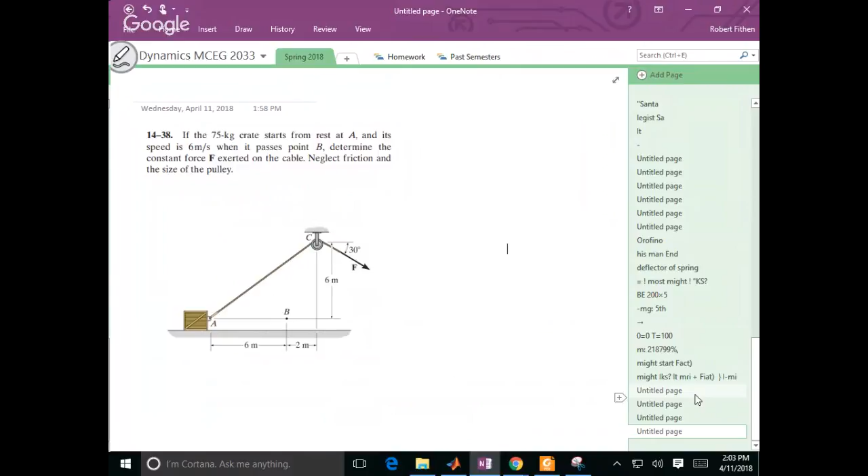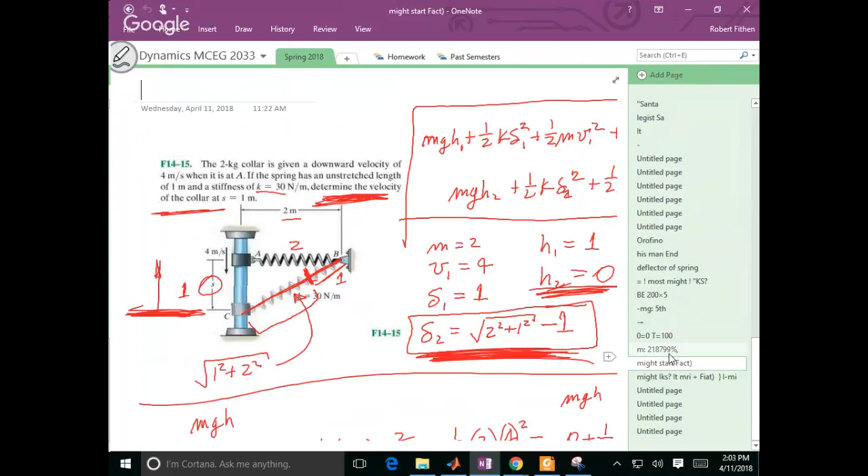4 problems on there. Figure if we can work those 4 by the end of the day. So what I'm doing is I'm basically, wait a minute. It didn't save. Yeah, it did. There we go. So that's where I left us at.

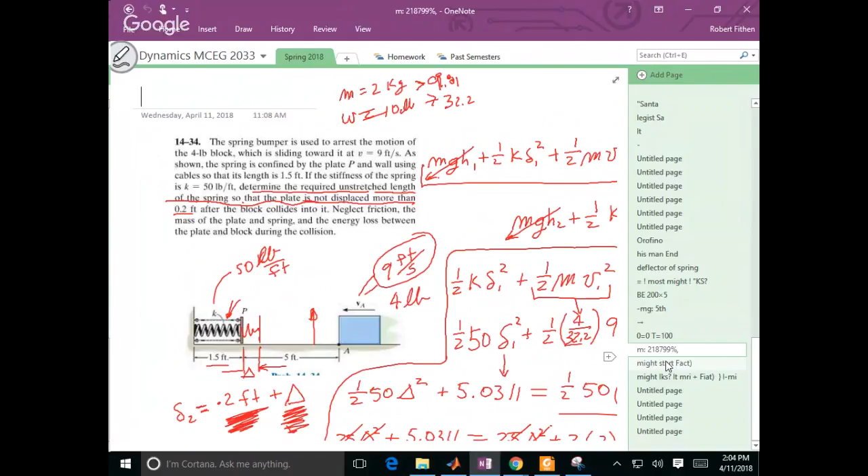And what I'm doing is I'm working other problems. And so I'm going to kind of work problems in theirs and then a different one in yours for about a week, so that I'll cover a lot of problems, but they all look about the same. So I work those problems. And there's the video there. You could watch it in high speed, actually. So I'm going to do the same thing and work this set. And then that means Friday, I'll start 15.

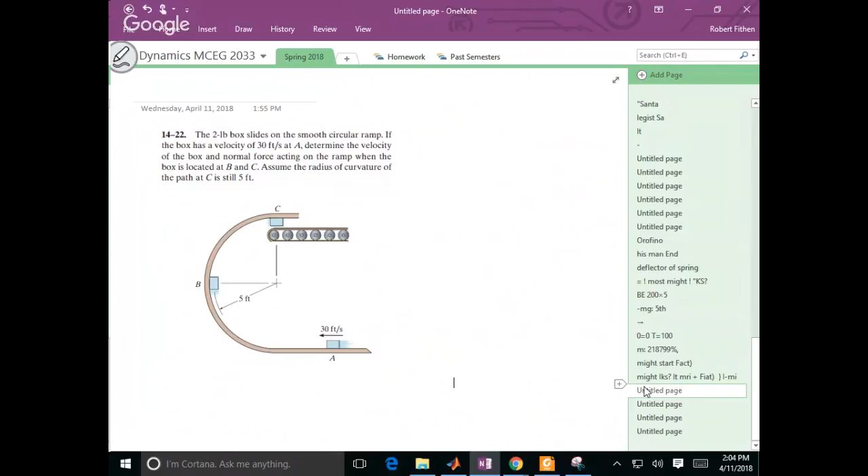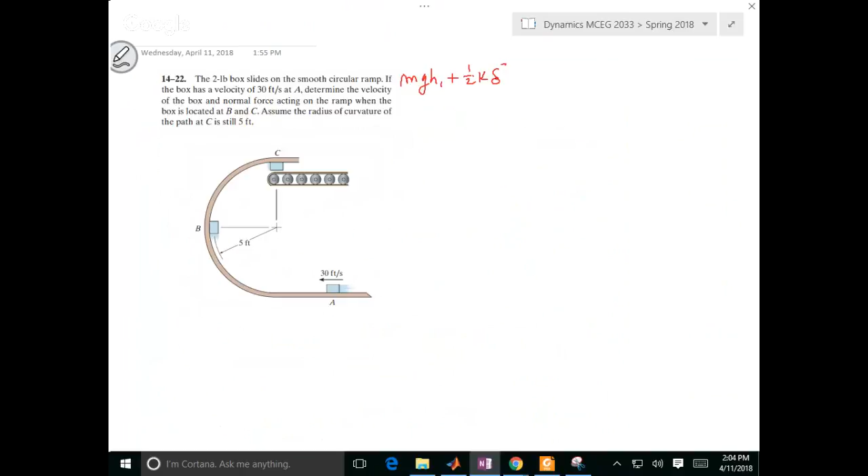Yeah, I hope it works right. So it says a 2-pound. Okay, so before I do any of these, let me make sure I got the pen the way I want it. Okay. So all of these energies, I always start the same way. mgh1 plus 1/2 k delta squared. I know there's no spring, but I just write the equation just blindly. Is it just basically one equation? Yeah, just reapplied to all the different cases. So to me, I always write the same equation.

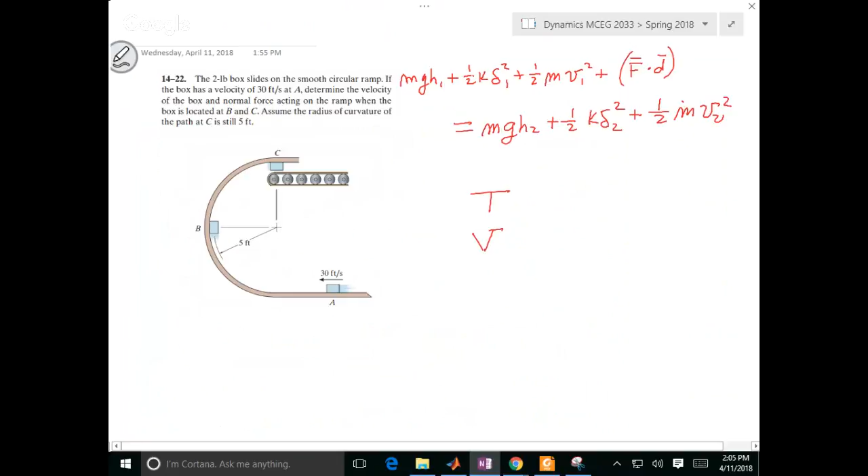Now what he does in the book, he has this term T, he has a term V, he has U from 1 to 2. And if you look at all of these equations all together, you'll realize in all single cases, this covers all of that. And that's why I come back to this, it covers everything. So this way I don't have to remember what was T, what was V, what was U, all that sort of stuff.

This way I remember I have potential energy here, kinetic there. I may lose or gain some energy due to friction or somebody pushing on a box or whatever. Then I have potential energy here, and then I have kinetic there. And so I just do it that way because it's sort of straightforward and it covers all cases. So I come in here. Okay, so now I started addressing this.

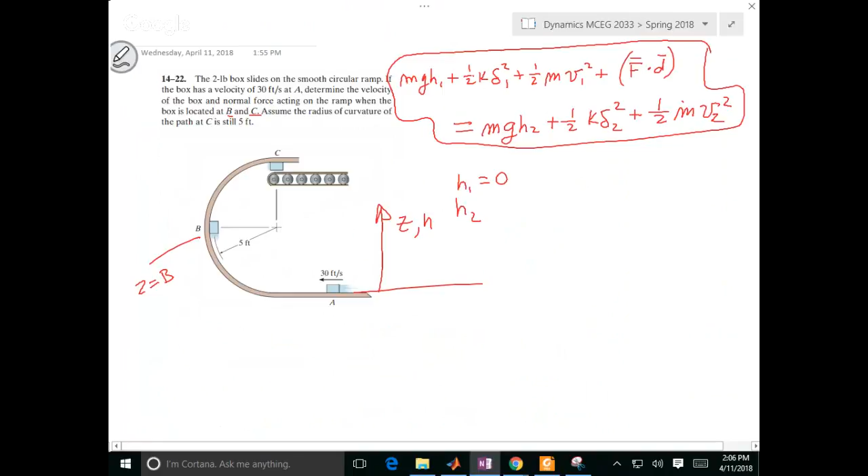First thing, I got to figure out my H's. So I'm just going to take this to be my Z or H, whatever you want to call it. Different books will call it Z. So this is the height you move a box up or down. So that means H1 is equal to 0. H2 is equal to, wait a minute, determine the velocity of the box when the box is at C and at B. Okay, so let's do state 2 equal to B first. And then state 3 is equal to C. So I could redo this equation another case.

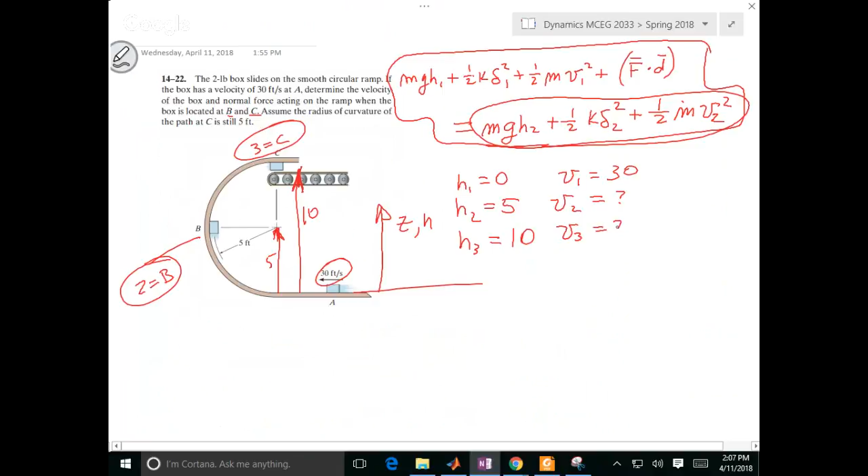So H2 would equal 5 foot. H3 has got to equal 10 foot. So I'm basically defining 2 of these end states. And this is going to go up here to this one. So this will be 10 foot, that'll be 5 foot. Now V1 is equal to, he told me, 30 feet per second. V2, I don't know. V3, I don't know. There are no springs. And is it smooth? It's smooth, so there's none of that.

So that tells you that the only thing that happens is the kinetic energy turns into potential by sliding up the hill. And so what I get is mgh1 plus 1/2 mv1 squared is equal to mgh2 plus 1/2 mv2 squared, where 2 is equal to B. And then state 3 is C. Since there wasn't any loss of energy all along the way, I can do that.

Okay, so now I'll address each one. Oh, well, that's easy. That's 0. So I get 0 plus 1/2, and it's 2 pounds over 32.2. So that's how many slugs it is. Going 30 feet per second. So the thing has that initial energy.

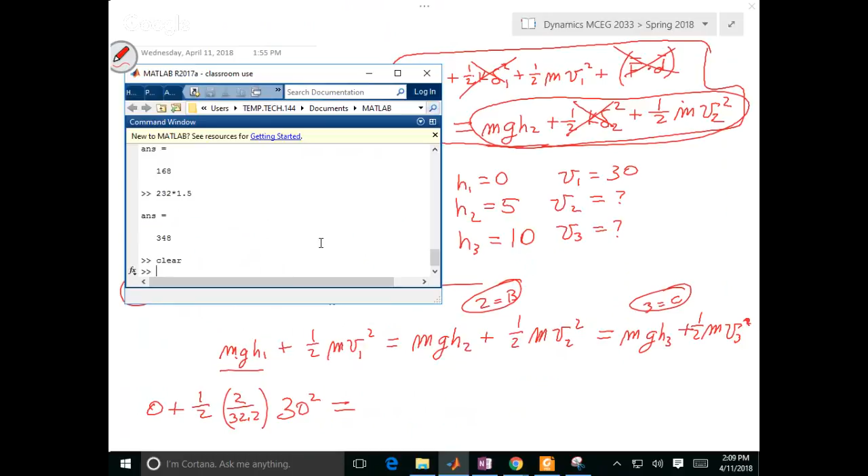That's what I'm saying, you don't have to put in the 2 over 32.2. Yeah, you don't, but should I do that? Should I knock it out? Yeah. Well, you know what? Since I'm shooting for that, let's go ahead and do that and make it easy. I think you're right. I'll just go ahead and cross out that.

No. So I'll say that, and then, wait a minute. Actually, well, it will show up. Well, it's not a bad complication. So I got this potential, I mean, the kinetic energy right there without the mass.

Then I got to have gh2. Well, g is 32.2. And if I was putting the mass back, the mg would be just that 2 pounds. h in this case is 5, plus 1/2 V2 squared. But it's also equal to 32.2, in this case it's 10, plus 1/2 V3 squared. So now I've got 2 possible things to worry about. First, let me worry about what's on the left side here.

If I pull up MATLAB, let's do a clear, 30 squared divided by 2, 450. I got 450 is equal to 5 times 32.2 and then 10 times 32.2. This is 161. Whoa. 161 plus 1/2 V2 squared is equal to, okay, but it's also 322 plus 1/2 V3 squared. So as you get higher, this number overruns it. And so even at this point, both these numbers are smaller than that 450.

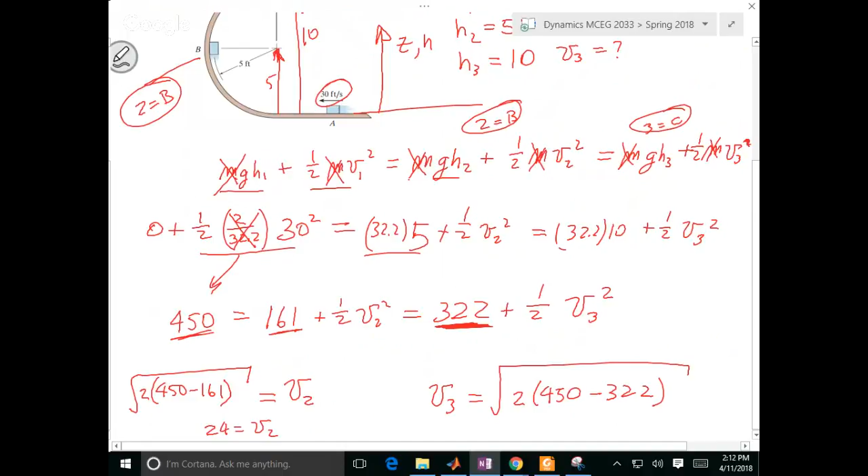So what I'll do is get V2 equals 450 minus 161, but I don't have enough room. So then, well, times 2 and then the square root. But I'll also get V3 is equal to the square root of 2 times 450 minus 322. I don't know what those numbers are. Okay, square root of 2 times 450 minus 161. 24. I'll just say it's 24. And then I'll say V3 is around, you got it, 16.

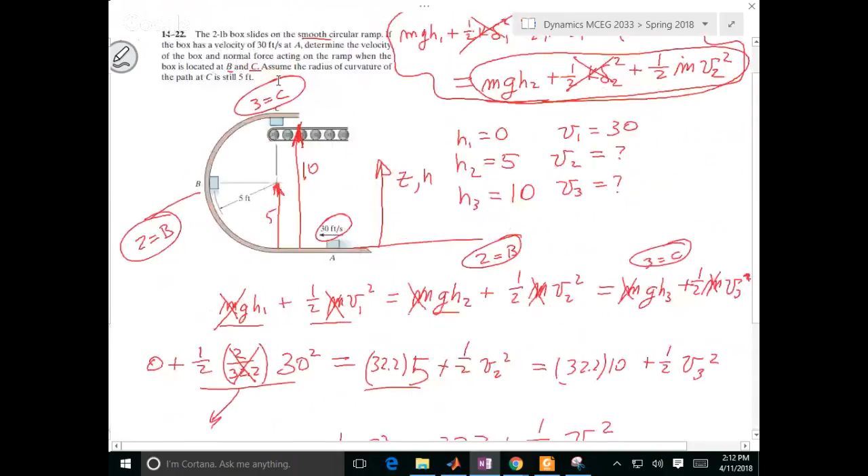Now did he ask for something more? Velocity of the box and the normal force acting on the ramp when the box is located at B and at C. Okay, so let's do B first. B, the box sits like this. It's flying along in this direction, V. It's got a mass. I shouldn't have put that arrow on there. Here, I'll do it like this. So it's V, it's 24. It's got a normal force there. So here's your normal. Sum of the forces, here I'll say the normal force. And this is, was it 2 pounds?

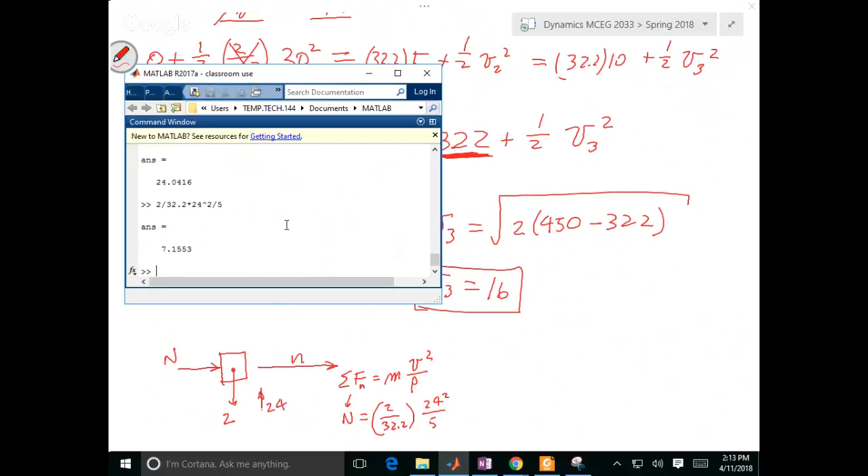2 pounds. Sum of the forces in the normal direction equals mass V squared over rho. Well, rho was 5, right? Okay, so on the left, all you get is the normal force. On the right, you get the 2 pounds over 32.2, the speed is 24 squared, and then the R is 5. So hopefully you should get 2 divided by 32.2 times 24 squared divided by 5. 7.15. 7.15 pounds.

That free body diagram looks different than when it's at the top. When it's at the top, this is the normal force. Ooh, that looks funny. This is the weight, 2 pounds. Speed is going this way. And that's it. So sum of the forces in the normal direction equals mass v squared over rho. Go ahead and stick them in. 2 over 32.2, that's the number of slugs. 16 squared divided by 5, because it's still 5.

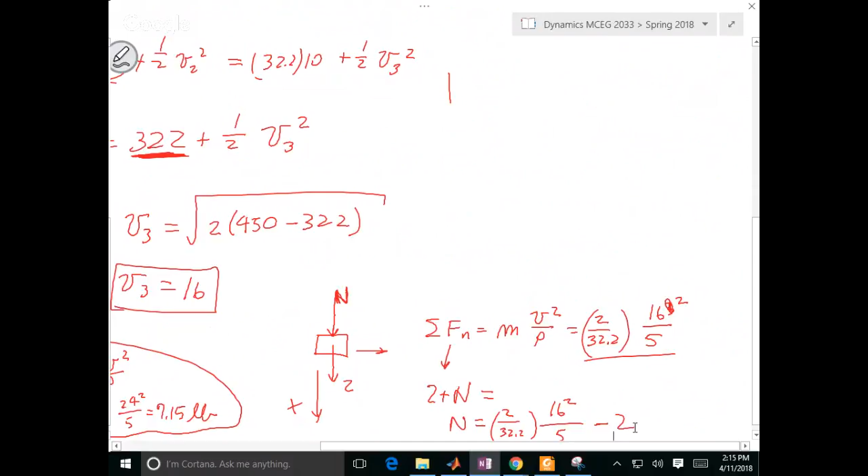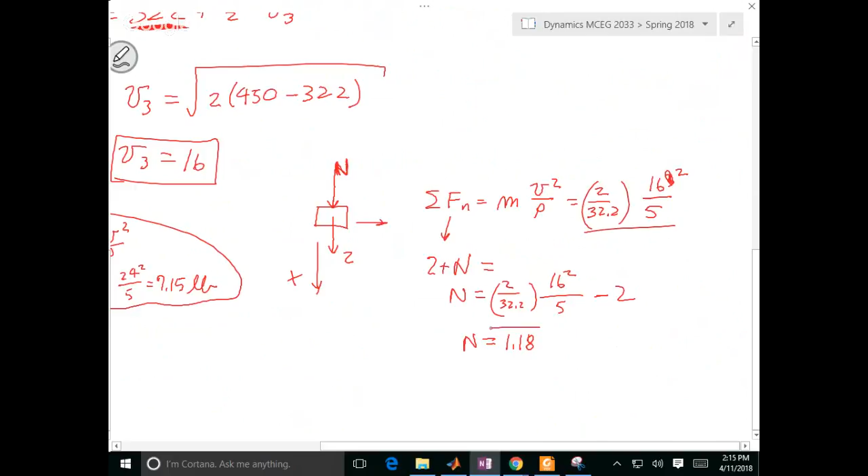On the left, since that's the positive normal direction, you get 2 plus N. Okay, and this number, or I can just do this. N is equal to 2 divided by 32.2, times 16 squared over 5 minus 2 pounds. 1.18, okay. Okay, so let's shrink it down and let's check our answers.

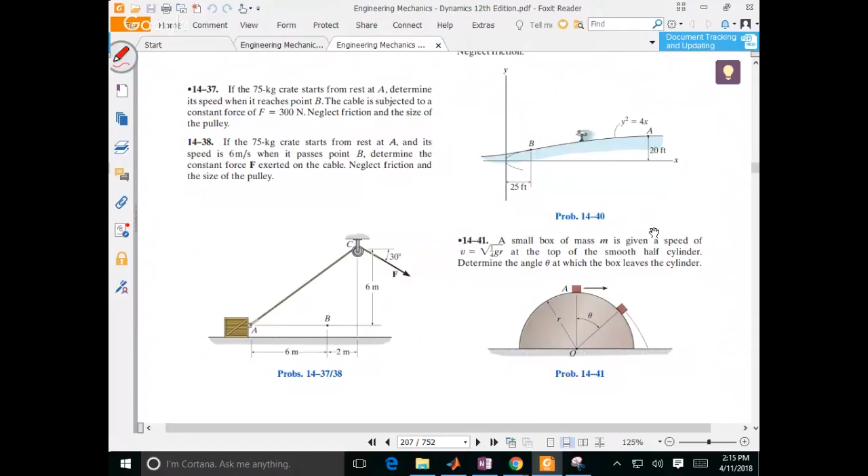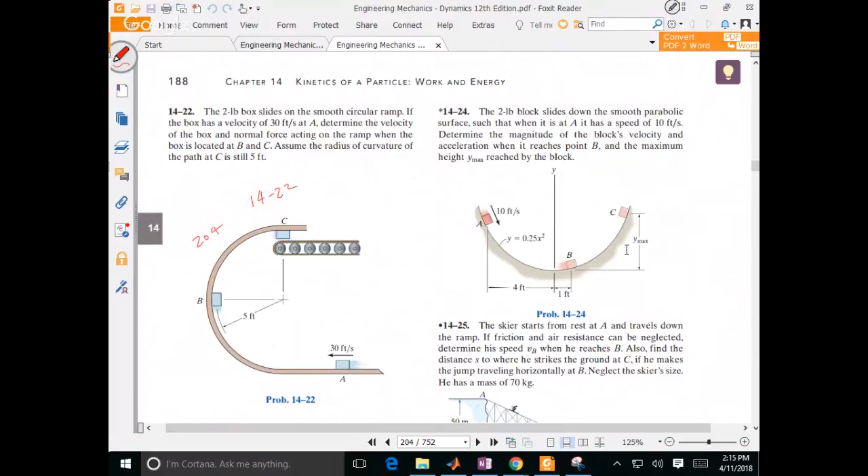However, I think I might have used the wrong edition of the book. I'm in the 12th edition. Well, it's too late now. I had the 13th up and I was looking at the 12th. It doesn't matter. They're all the same thing. So it might be a different problem. Why did I do that? I don't know why I did that. There it is. So it's 14-22 on page 204. Okay, 14-22.

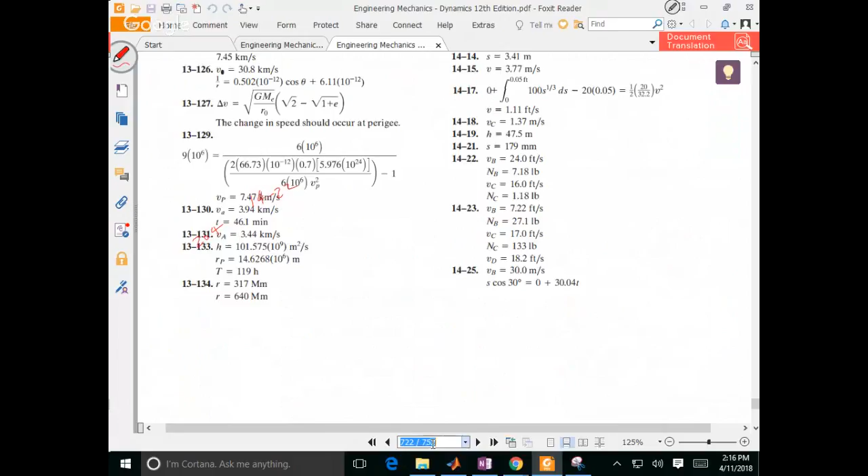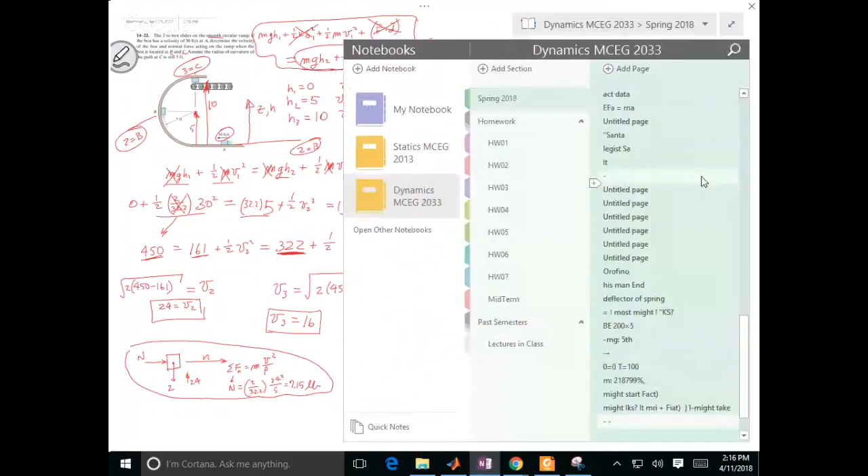Okay, so we got all that right. Yeah, that's right, because that was one of the numbers. Yep, 7.18. Okay, so we got it. So now what was it, 204? 204 takes us back to there. What was the other problem? I think I did that box next. Go down one, the box. Yeah, I did it because it had a coefficient of friction. This one should be fairly quick.

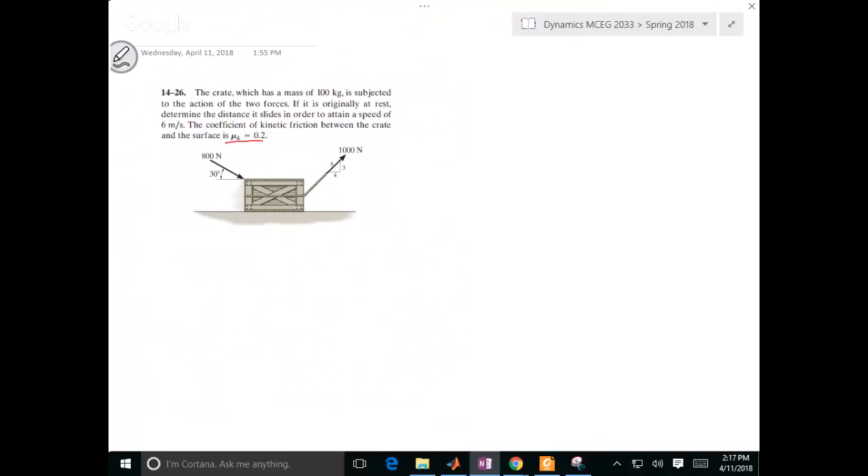The crate has a mass of 100 kilograms. It's subject to the action of the two forces. If it's originally at rest, determine the distance it slides in order to attain a speed of 6 meters per second. Coefficient of friction is that. First thing I'm going to do is I'm going to just use this box as the free body diagram. He did a good job on the box. Uh-oh. What happened?

What did he do? I don't know. Oh, I did. My knee hit that DVD button. I thought I broke something. I noticed I had a happy look there. Yeah, there you go.

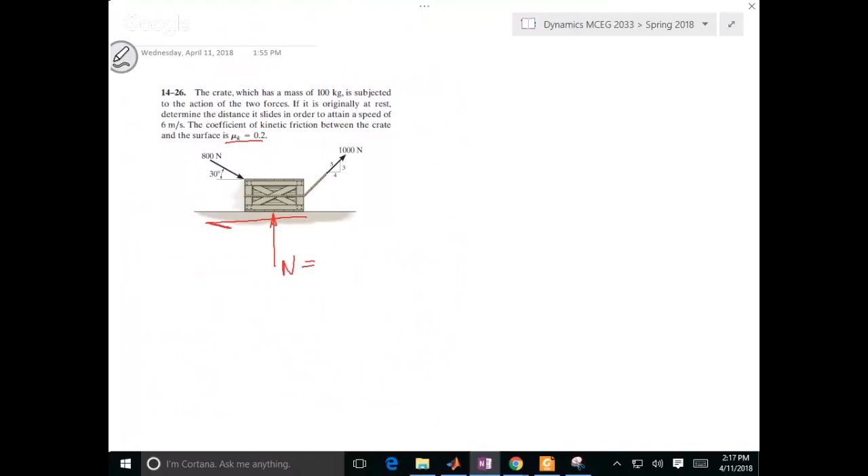Okay, sum of forces in the y direction equals 0 because it's not moving up or down.

So, did the fan change? It's like the fan changed. I didn't notice it. Oh, okay. Okay.

Okay, so I got this. I'm going to make that be positive. So I got n plus that 1,000, but I got 3/5 of it. So I'll just write down 3/5 of 1,000. I'll figure that out in a minute. Oh, geez, he's got a 30-degree thing. So then he's got minus 800 times, what is that? Nah, we'll just keep it that way because then we can look at the answer in the back of the book, you know.

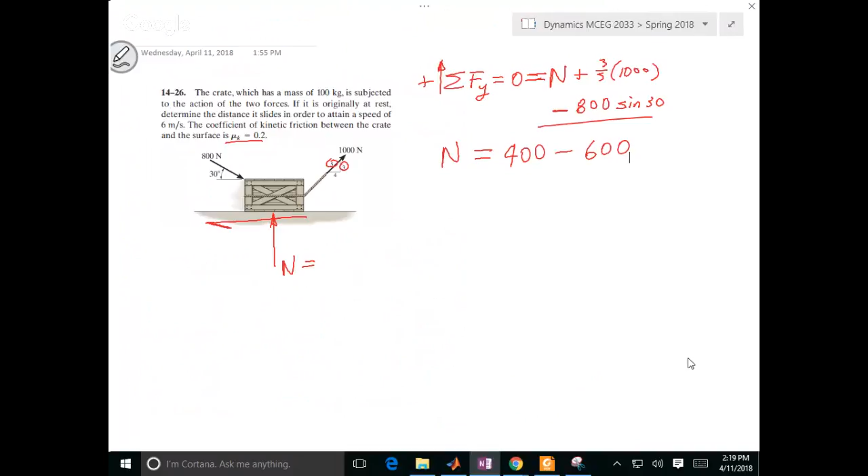Yeah, I forgot something else too. I was like, wait, 100 kilograms. Okay. So that is an opposite. So I got to put that 9810. Wait a minute. One digit, two digit. Wait, one. Yeah. Okay, so to move that over. Oh, shoot. I got to put a. Okay, 981. You think, is that the right answer? 781 is the total? Okay, all right, yeah.

Okay, so I got that, and the force due to friction is equal to 7, yeah, what is that? It's not 14, it's 15.62. Oh, is it 156.2? Really? Okay. Yeah, I got my digit in the wrong place.

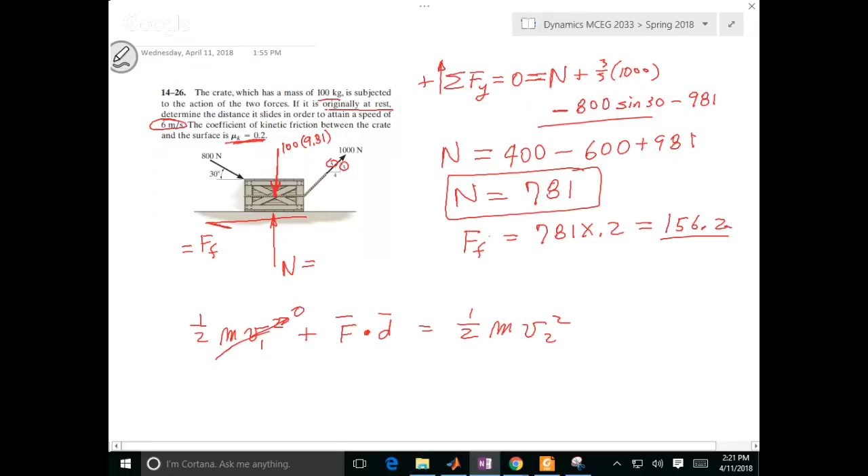So, okay, it started originally at rest. Woo, that makes it easy. I kept thinking, oh man. Okay, so now I've got all these F dot Ds. Actually, I got 3 of them. I got this one, that one, and that one. So equal to 1/2. What is the m of this thing? 100. And this is 6 squared, 36, and half of 36, 18. It's 1800. Is that right? Okay. All right. So here's the problem.

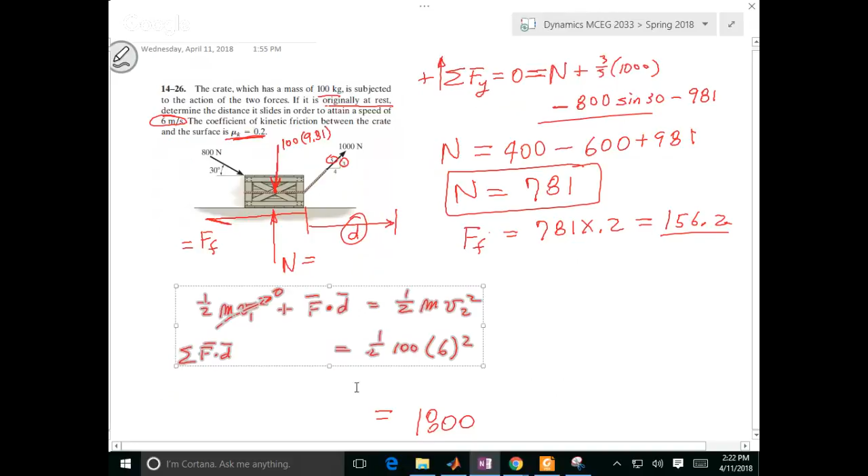So this thing is going to move to the right a certain distance, which we don't know. However, let me see if I can try something. Take that, shrink it, move it up a little bit so I'll have more space down here. There we go. So I got 1800. Let me count each one of them. I'll label this one 1, this one 2, and this one 3. And these are all my forces.

So my first one is 800, but the one that's going in the direction of D is the cosine part. Cosine of 30, because that's going in the direction of D. If you dot those two vectors, it's going to be plus, but it's also going to be d times that. So that is the first one. The second one, I'm doing F dot d, so I'll do the distance first. The F in that direction is the 4/5. 4/5 of 1,000, I think that's 800. That's the second one.

So this one and this one give energy to the system. The next one takes it away, because the F is going in the reverse direction of the distance. We figured that out as 156.2, and it's a distance D. So this sucks energy out of the system due to friction. That's the friction loss. So now I just got to find each one of these terms.

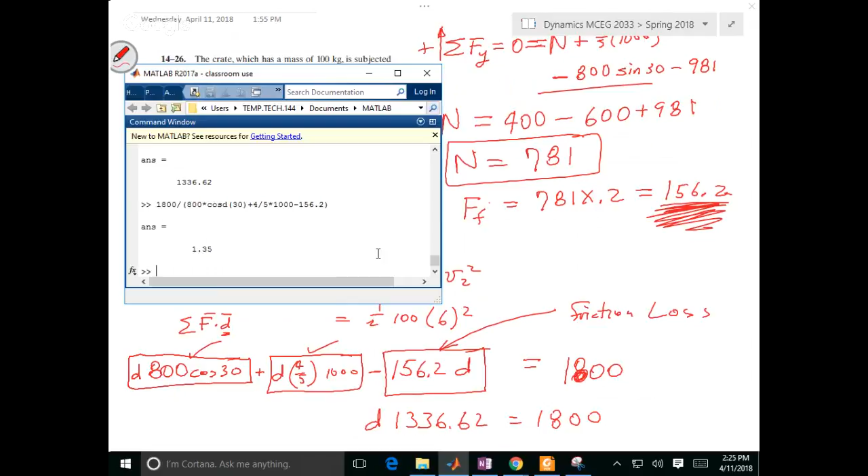Okay, so I do 800 times cosine of 30 degrees plus 4 divided by 5 times 1,000. What? That's 156.2. Ugh. Okay. What was it again? 13. Okay, so let's do it this way. Slide all this junk over here. 1,800 divided by that. 1.35 feet. Meters. Okay.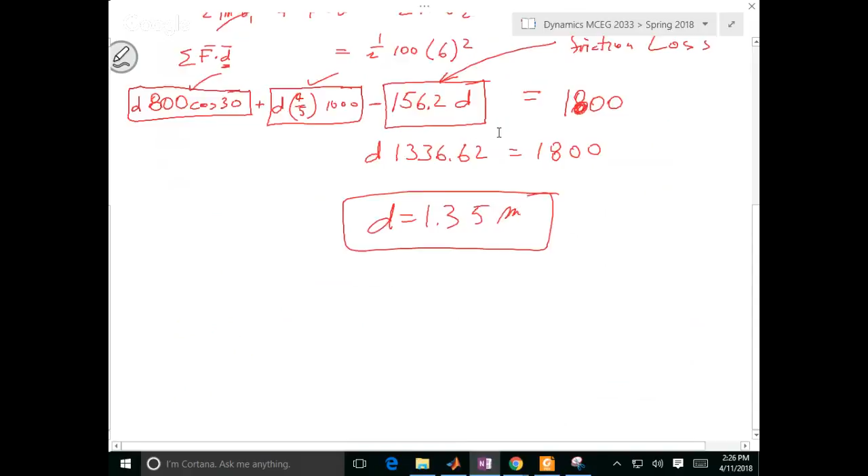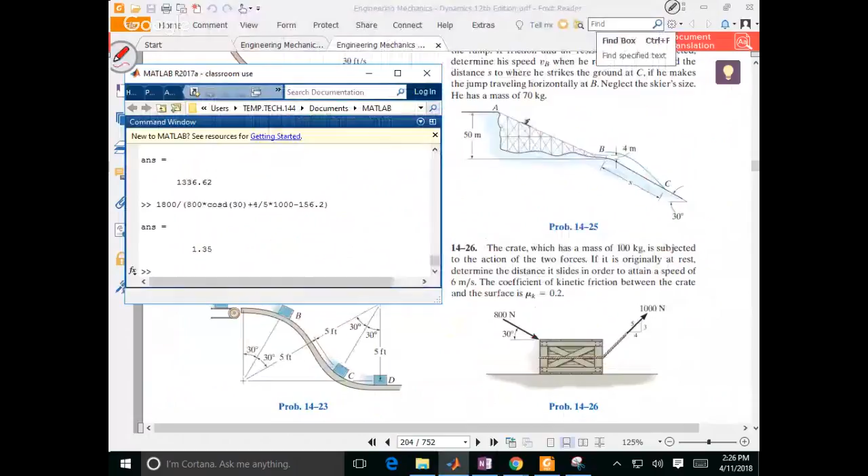So that one's kind of beneficial because it highlights this thing. What happened? Okay, that's weird. Now I don't know what happened. Where did it go? Okay, well. I was just going to try to get over here and say this problem highlighted that thing.

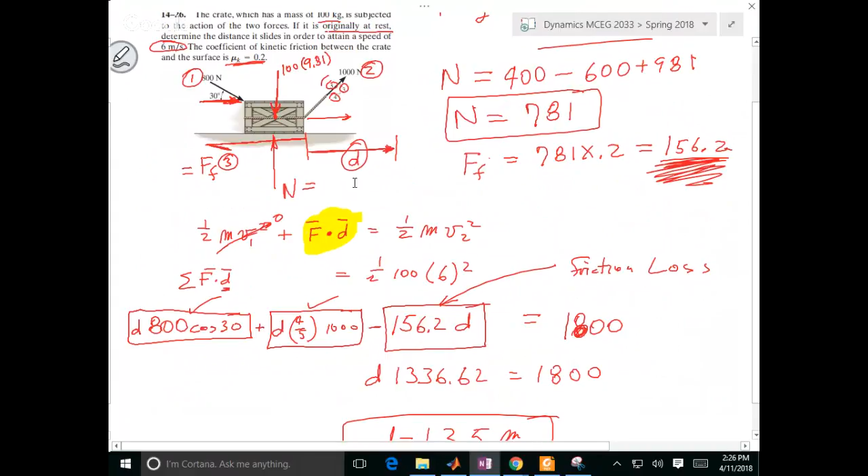Now let's see how off or wrong I am there. Okay, this time it's 1426. Still on page 204. 1426. 14 here. I better get rid of this. Better get rid of that one. 1426.

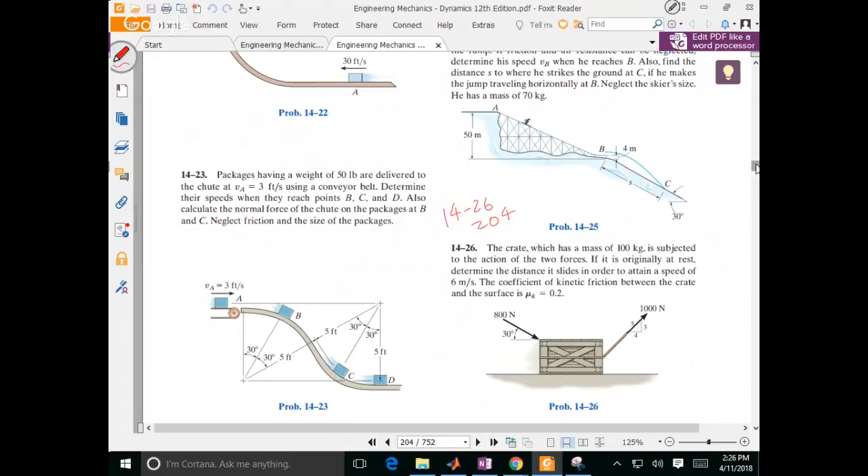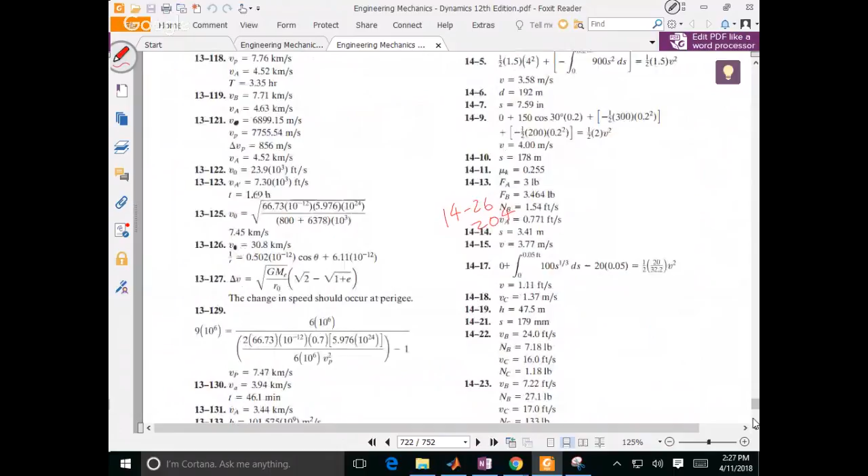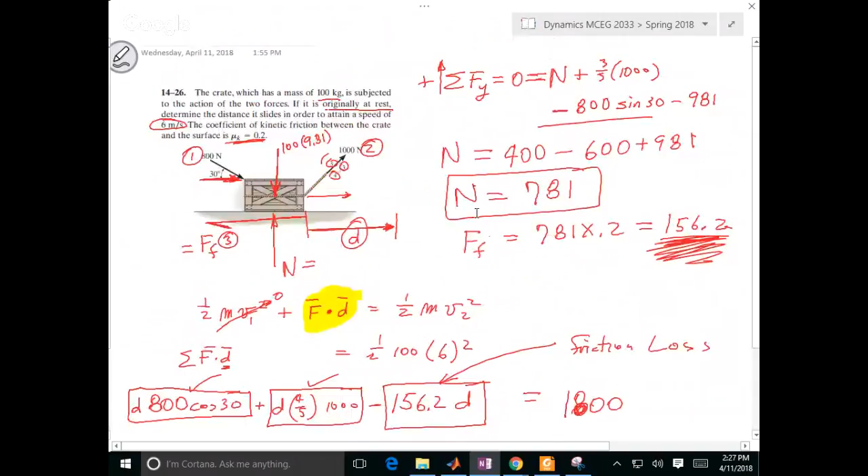Close. Oh, 1.35 meters. Is that what I got? Yep, that's it. So all that to get that. Let's see. What's the next problem?

Oh, where is it at? Where? Oh, right here. That one? No, not that one. Really? Did I do one in the? Wait a minute. No, that's not. Wait, is that the one? What'd you think of it? He's trying to get off easy on this. Oh, okay. You got me confused. I'm like, that's not friction or anything. That's a.

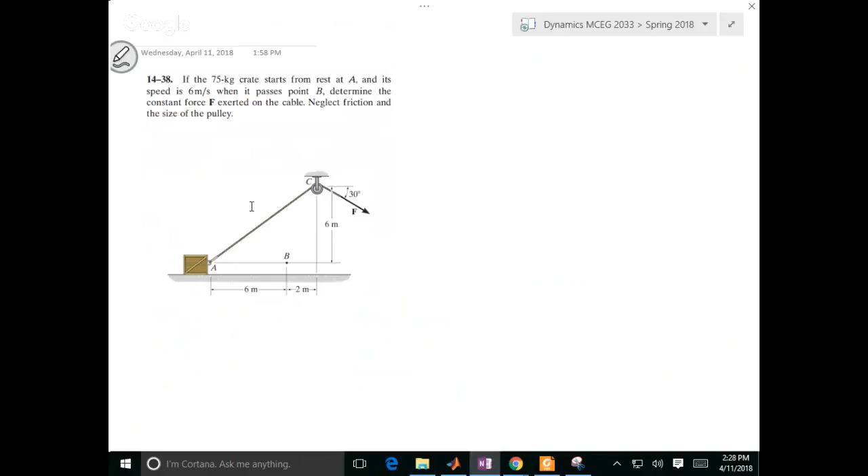Well, here, let's do this other one first. Where? Okay, wait a minute. What? Okay. Here we go. Yeah, they confused me. Okay, so do I want to do this one next or the next one? I don't know. You know what? Maybe I'll do this one and then do the next one, and then I may call it a day after this one. Instead of doing 4 today, I'll do 3. How about that? Well, I don't know how many I do most any day. Yeah,

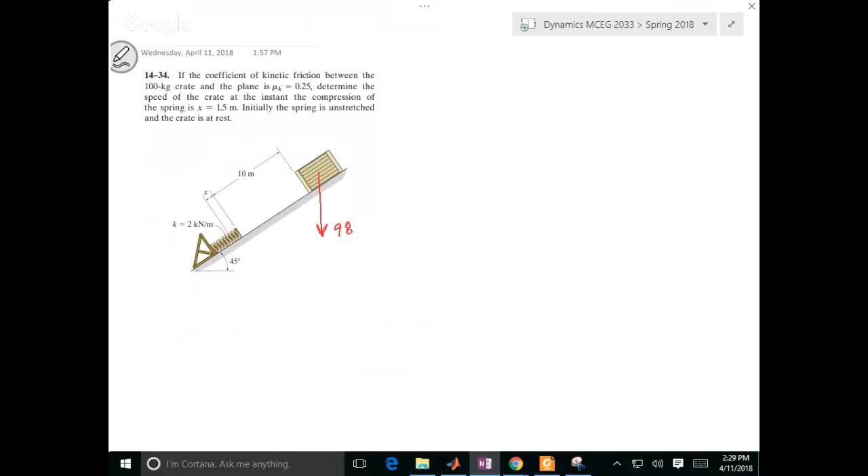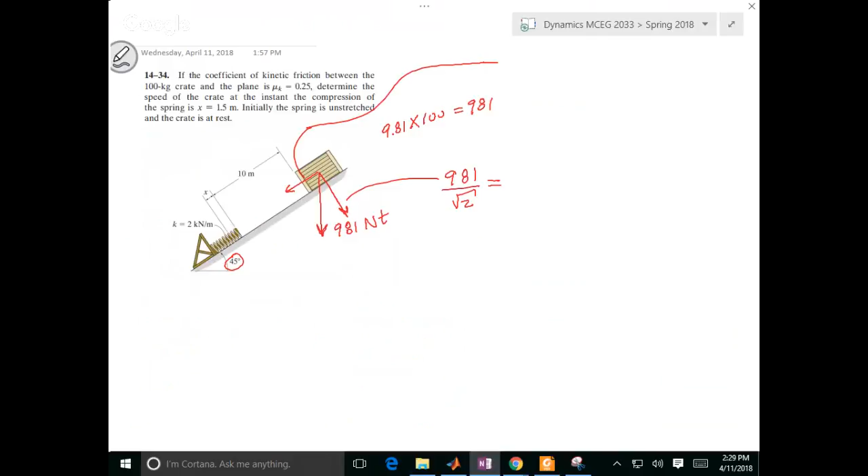there you go. So this says if the coefficient of friction is between the 100 kilogram crate, oops, here, 100 kilogram, that's 981 newtons. Is that right? I hope that's 981. Okay, so 981 newtons. That means this one and this one are equal because it's 45. So this would be 981 divided by square root of 2. And that'd be 693.7.

693.7. Since the coefficient of friction is that, then this friction must be 693.7 times 0.25. What's that number? Okay, so that's the force due to friction that's slowing this thing down. Determine the speed of the crate at the instant the compression of the spring is that. Initially, the spring is unstretched and the crate is at rest. Okay. So here I'm just going to do all of them.

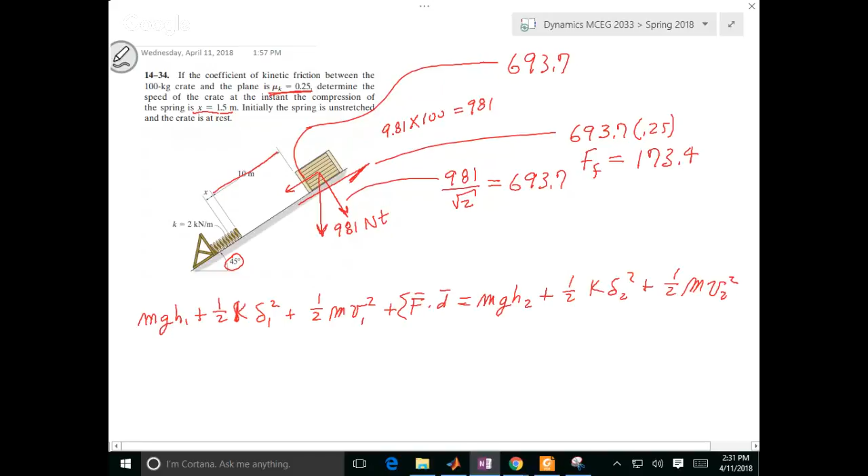MGH1 plus 1/2 K delta 1 squared plus 1/2 M V1 squared, plus all the F dot Ds, which I guess I should put a summation on that. But there's only one in this case. Okay, then MGH2 plus 1/2 K delta 2 squared plus 1/2 M V2 squared. Okay. He says this is 10 meters. He says I'm going this, so this distance is actually 11.5 meters.

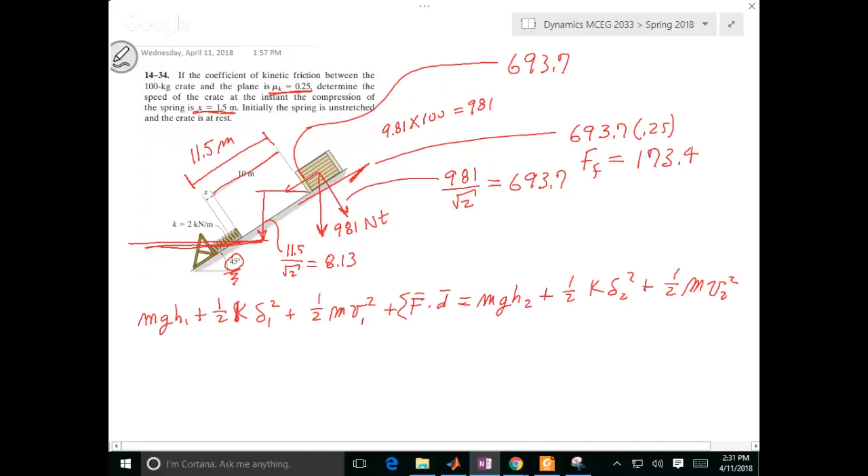So if that's the case, and I look at the distance between here and here, that has to be 11.5 divided by square root of 2 because it's 45 degrees. And that is 8.13. Okay, so I'm going to take my datum to be right there. H1 is at the top, 2 is at the bottom. So H1 is 8.13, H2 is equal to 0. That gives me my potential energy difference. So now I've got 100 kilogram crate, 9.81, 8.13, plus no kinetic energy, no potential energy, no kinetic energy.

Now what happens is I scrub off some energy as I go down. Force of friction times the distance, or 11.5, because I'm scrubbing off that energy, and the force of friction we already figured out, or you did, 173.4, equals to, that's 0. This has some potential energy, since the spring is compressed a certain amount, 1/2 K.

Okay, now this I got to be careful of. That's kilonewtons, and these are newtons. So this has to be 2,000. Delta, he said, is 1.5, squared, plus 1/2. The mass of this thing's still 100, and there's the speed. Wow, I hope this thing works out. So 100 times 9.81 times 8.13 gives me 7975. 7975.53 minus. Okay, I'm a little scared.

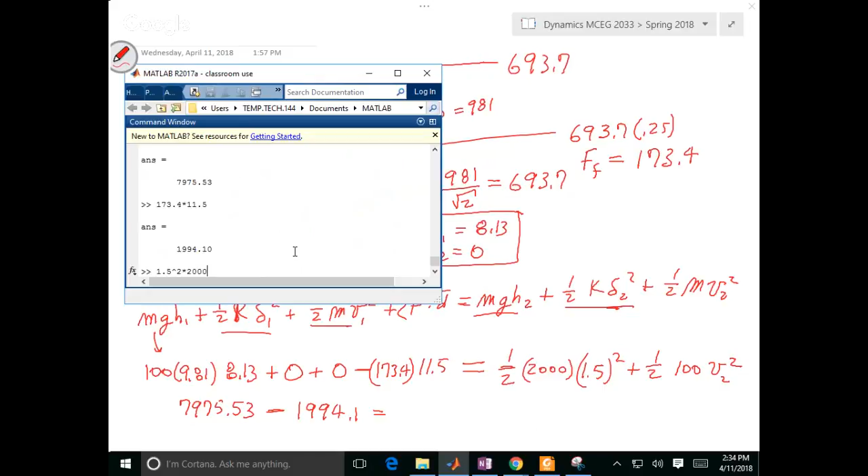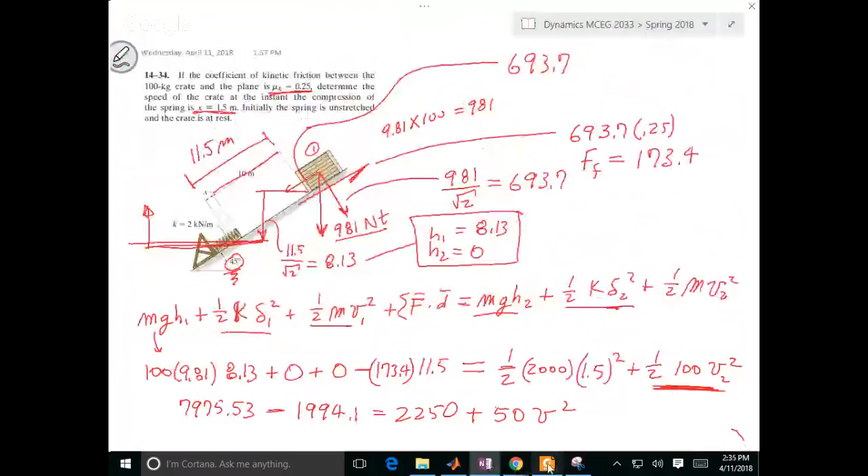173.4 times 11.5, 1994.1, equals. And all that spring energy here, 1.5 squared times 2,000 over 2, 2250, plus 50 times v squared. So now, scratch down so I can move down the page. That's what you get by moving all that. 8.64. Okay. Did I leave the number with it? 14-34. Okay, there you go.

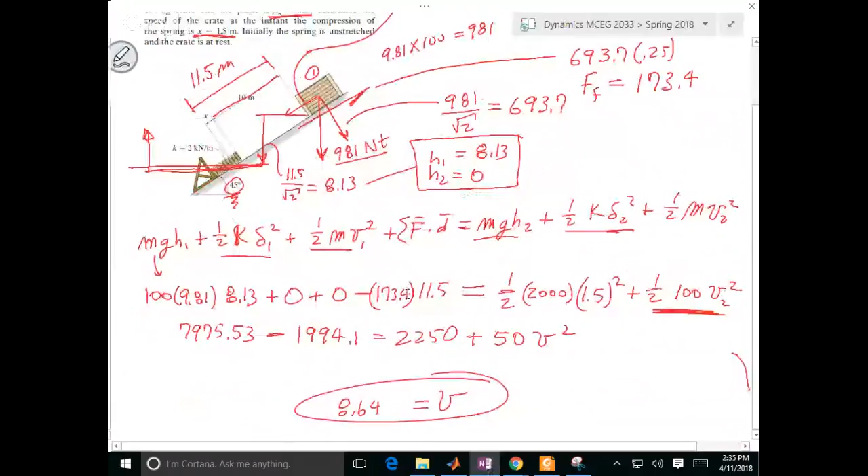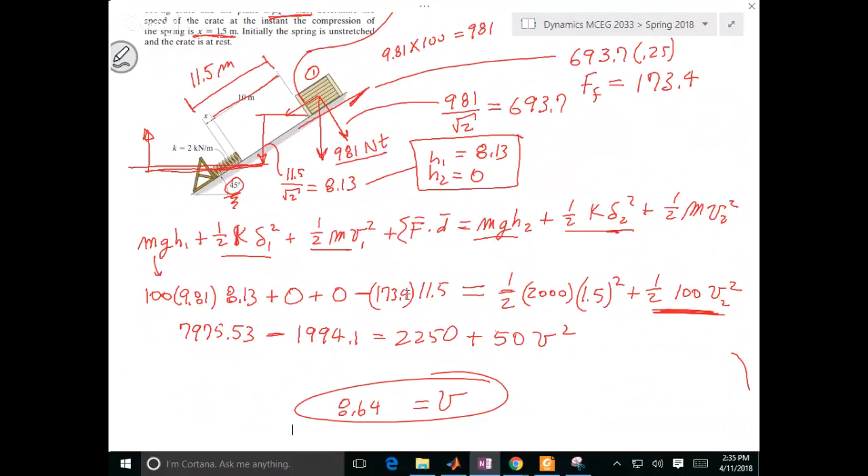So I don't know. Do y'all want to do another one? Y'all want to do that last one or? Nah. Oh man. That midterm's not nice, dude. I don't know what you really. Oh, it was okay. It's all right. Here. It's not bad. It's okay. It's not sharp teeth. We'll survive. It's okay.